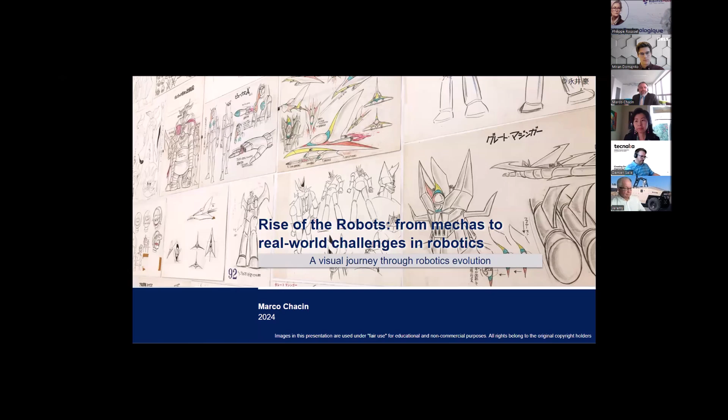About myself: I'm calling from the UK, but originally from Venezuela in South America. I'm 46 years old, and a father of four. I've had a very interesting journey through robotics, one that's taken me around the world. Today, I work for Airbus as head of Actuators and Effectors for the Central Robotics Development team. However, my journey in robotics truly started when I was a very young boy.

I had a fascination for Japanese animation shows, specifically the ones with mechas. For those who haven't heard the term, mecha is a Japanese word that refers to giant robots, typically piloted and depicted as huge humanoid walking machines featured in anime and manga. These robots have captured people's imagination for decades.

Personally, I fondly remember Astro Boy. Perhaps some of you in the audience will have seen this, its humanoid protagonist, who was a key influence in the development of the giant robot genre.

However, the first anime with giant mecha that depicted a pilot, its protagonist piloting the robot within the cockpit, was Mazinger Z. Mazinger was introduced in the 70s, and it has inspired and popularized the idea with many other series of animes and mangas, such as Gundam, which I'm pretty sure some of you who are geeks like me would know. In this series specifically, robots were used as tools for human advancement, and the authors attempted realism with the robot design and weaponry.

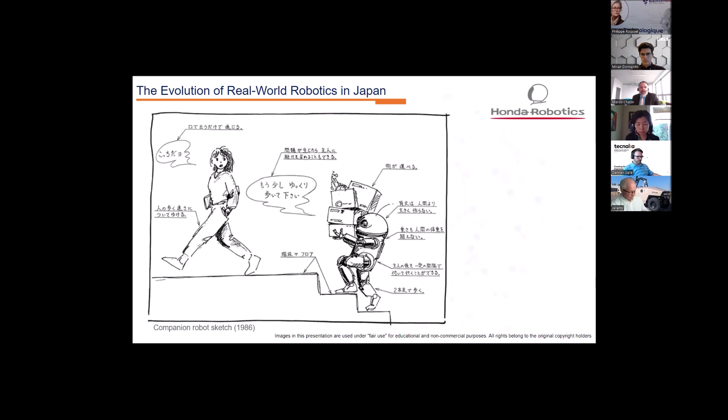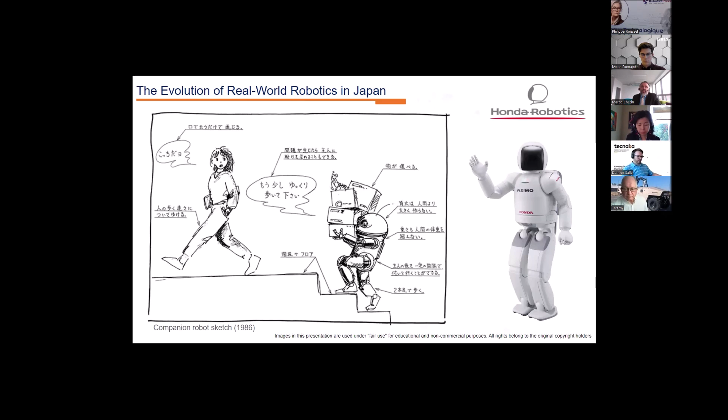Some of these also became requirements for the development of ASIMO, which is also another influential robot over the last 20 to 30 years. At the same time, new factories were created and robots introduced to aid manufacturing, many with the same challenges that we have today, like precision, speed, reliability, and safety.

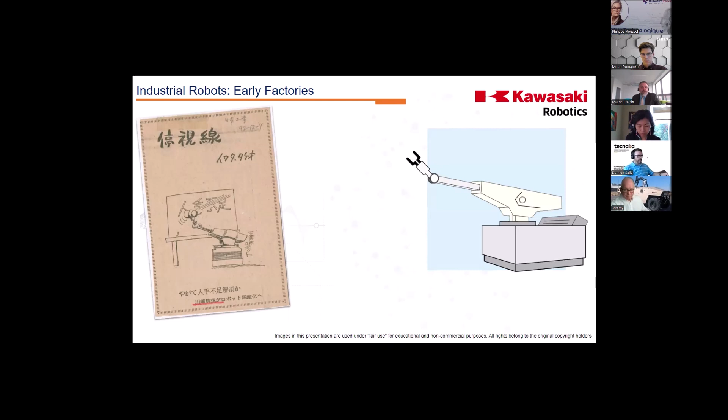When Kawasaki introduced the first industrial robot, the Unimate, in '69, the automotive industry was the only one willing to utilize robotic automation. During this time, Japan had a period of economic growth, but labor shortages became a major social issue, and a lot of people from rural areas came to the city looking for work. But even then, that was not enough to fully alleviate the issues businesses were experiencing due to the lack of labor.

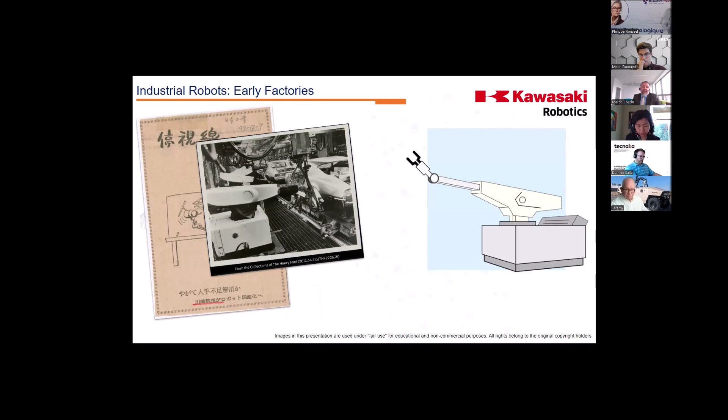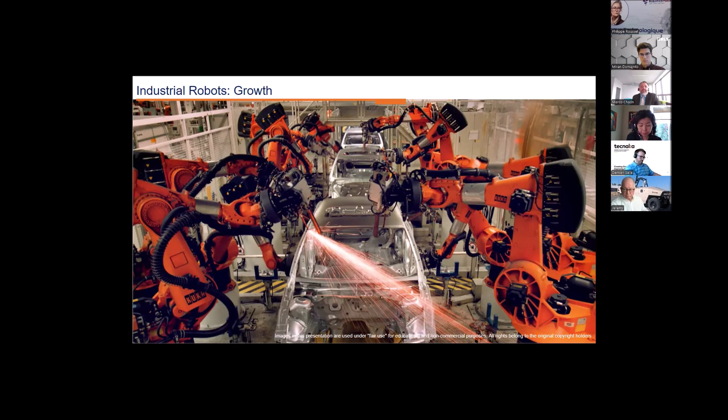Following that, Japan had a sharp rise in car sales thanks to the rapid effect of motorization. For the first time in that country's history, it became commonplace for households to have a car for personal use. So automotive manufacturers had to find a way - and that way was automation - to increase their throughput through production lines and keep up with the booming demand.

Fast forward 50 years since the birth of industrial robots. From the beginning, as I said, the automotive industry has served as a catalyst for adoption. The overwhelming success of robots in industry has shown how beneficial robots can be for other industries as well.

Nowadays, there are vastly different types of industries, and they use different robot arms for electronics, food and beverage, medical work, even metal fabrication, etc. Both performing complex and simple tasks on a day-to-day basis.

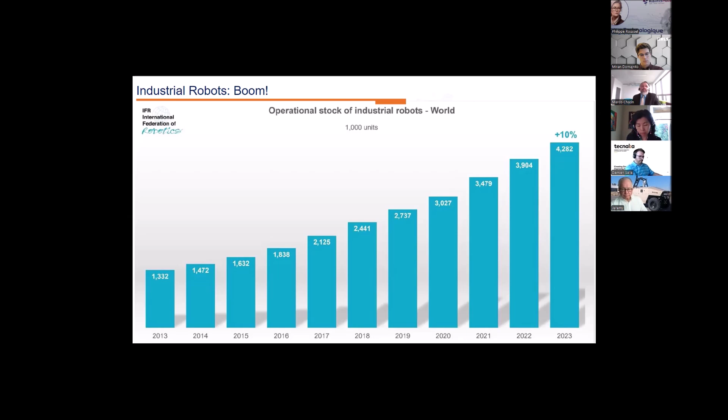This meant that robots are now getting close to the point at which they become a commodity. And come to think of it, I can only think of another device with a similar business model, and obviously there are more now, but the one that came to mind immediately was the smartphone. So you have an idea of what I'm talking about.

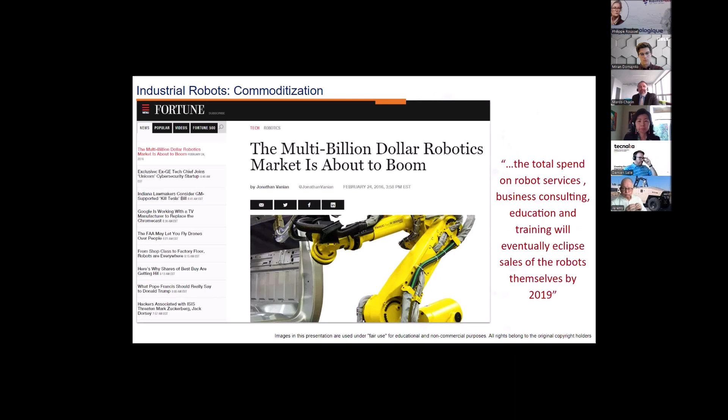Today, Apple, the biggest smartphone manufacturer in the world, generates about 250 to 400 billion dollars in iPhone sales every year. However, the App Store ecosystem generates 1.1 trillion dollars a year, according to 2022 figures, and surely that number has become bigger over the last couple of years. So you can see that applications are exactly what's driving the growth in this market.

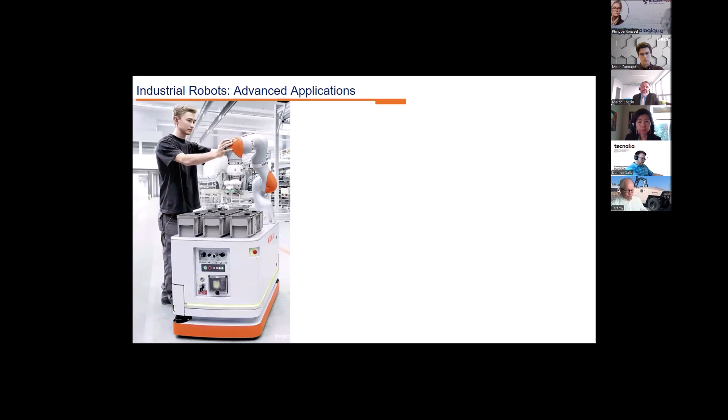The global market for robots is expected to reach about 40 billion this year, potentially doubling by 2030. However, the robots themselves are only a tiny fraction of the overall market. Typically, robot hardware accounts for 10%, sometimes even less, of the cost of the total system, whereas development, engineering, and integration of advanced applications can be as high as 30 or 40%. Clearly, there's still a lot of room to grow.

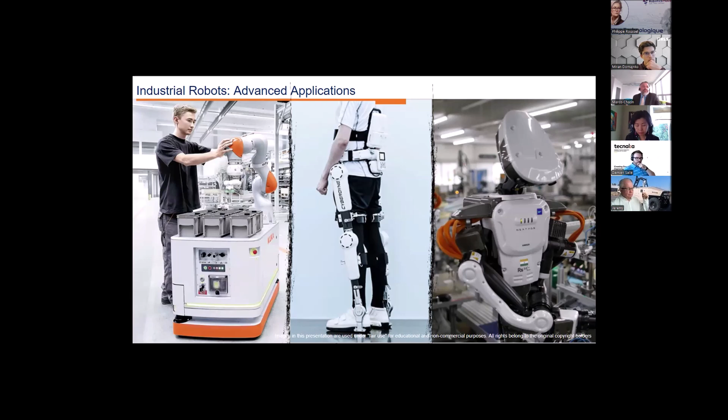However, when it comes to challenges in aerospace applications, even though we've seen a lot of advancements in other areas, aerospace manufacturing still remains a challenge for the current generation of robots. The challenge is due to the accuracy, reliability, and repeatability that is necessary. In creating production lines for aircraft assembly, inspection and testing is still an area of research and development. It is indeed very difficult to have robots do the work that humans are doing today on a day-to-day basis.

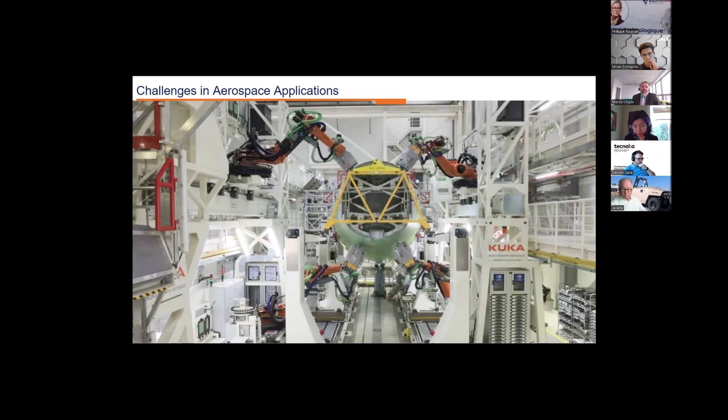At Airbus, we've been working closely with suppliers and manufacturers to create the robots most appropriate for our applications, since these robots are mainly driven by automotive requirements. We've gotten involved closely with some of these suppliers to design and improve robots that suit our needs. My colleague Damian Van Dam will present tomorrow, and this is likely part of his presentation too, so I don't want to spoil his work. But in reality, this is what is happening: we're trying to take our own destiny into our hands and make sure we can produce the best systems possible for what we want to do in the future.

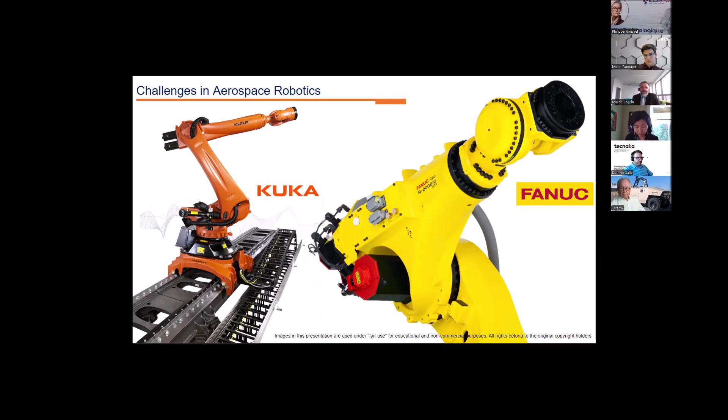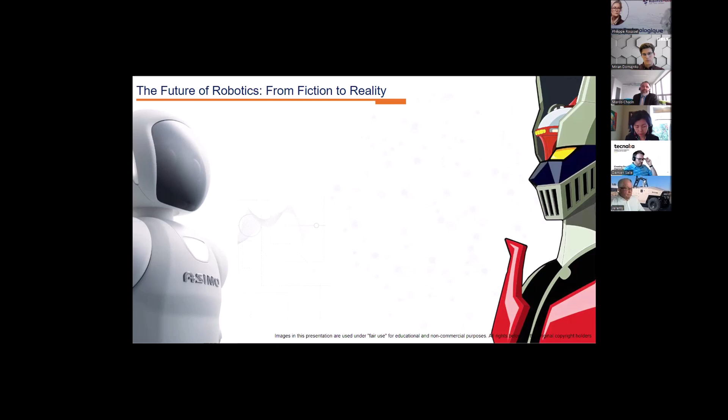Now we've reached the point in the presentation where I'm going to look ahead, see what the situation is today, and dare to offer a prediction. First, I believe we are realizing the anime vision, what I call the anime vision. Today's robots are making science fiction reality, no question about that. And as we've seen, this trend is accelerating significantly. I think we might be forced to go even faster than the pace we're going today. You might ask why that's the case — well, today we're running a global GDP of about $100 trillion.

It's a massive amount. The important point here is that labor, specifically human labor, contributes to 50% of that GDP. And as we've already seen, we're now experiencing labor shortages, and labor rates are going up. So traditionally manufacturing countries that have based their entire economy on these labor rates will be the first one to face the problems, although I think the rest of the world is not too far behind that sort of situation.

We will also have to deal with another couple of mega trends. One of them is the aging population. In many developed countries, the population is turning basically old, over 60. Places like Japan, for example, more than 30 to 40% of the population is already over 60. And because the population is not growing, it's very difficult to get the labor force to actually maintain that sort of population overhead.

And also the other thing we're seeing is the demographic inversion, people moving from the rural areas into the city. This will create problems with food and transportation, and clearly we will need help in the future.

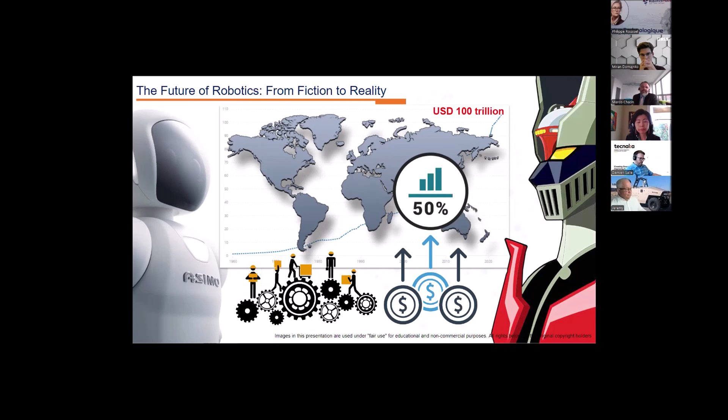So in order to alleviate these problems, I see two specific areas that are coming online right now. The first is the reemergence of humanoids. I say reemergence because this already happened once in the early 2000s. I will admit that humanoids are a very, quote unquote, sexy area of robotics. Today, this sort of thing is back, and the advancements in humanoid technology cannot be overstated.

The basic idea would be to put a quote unquote robotic person on doing tasks that are today not streamlined enough to happen without a human person. And I'm pretty sure there will be a marketplace for that over some interval of time.

But I do also see that improvements in safety, controls, and sensor fusion will be necessary to assist humans in most cases. And while I do see potential, I must point out that some people are predicting that by 2040, there could be somewhere between 1 to 10 billion humanoid robots on the planet. Although that might sound exciting, that would also mean there'd be as many robots as actual humans. So I believe these predictions may be a little bit optimistic. For context, I don't think we ever manufacture anything at that rate.

Apple, once again, to the same example, has produced 2.3 billion phones since the iPhone was introduced in 2007. So by comparison, it will be very difficult to get to the same kind of numbers in just a handful of years. I don't believe 1 billion humanoid robots will be feasible, but I do think we could potentially have millions of robots working with us over the next few years.

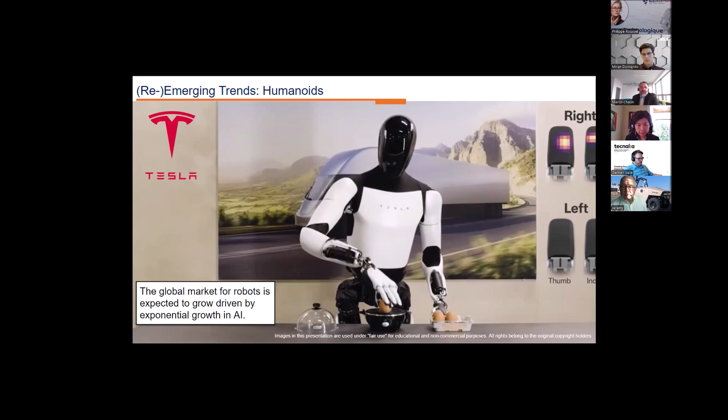And then the second trend is obviously artificial intelligence. This probably is one of the most important ones. Until recently, there was a divergence between the robots that can do interesting or physical work and the robots that are intelligent. The real smart robots were your Alexas, your Siris, your Google Homes of the world.

And with new advancements like ChatGPT, for example, I do envision a future with embodied AI robots, or embodied artificial intelligence, which is a type of AI that allows intelligent systems to interact and learn from the physical environment. I must say I've never seen a technology evolve so quickly since the introduction of ChatGPT and other large language models. We've seen a lot of growth and also a lot of technological advancement. I think this is an area that will help us significantly over the next few years.

So my key takeaways and looking ahead. Today we briefly discussed how anime has influenced robotic engineers like myself specifically, and innovation in the field. We also saw some of the ongoing challenges of the aerospace segment, and although we didn't go too deep into that, it was my intention to do something a little bit more fun and introduce you to this line of thinking.

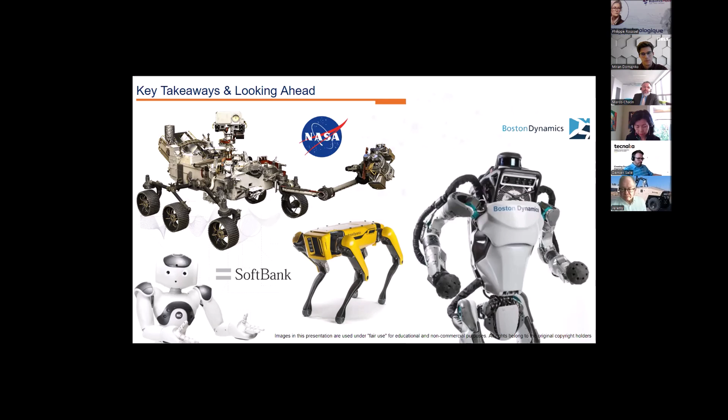Looking ahead, I do think that the future of robots, although it's still evolving, is still inspired by both fiction and technological advancement. And I for one cannot wait to see what robots have for us just around the corner. Thank you very much.